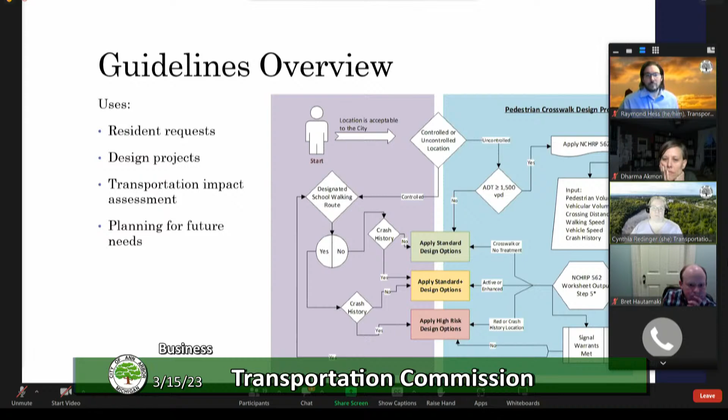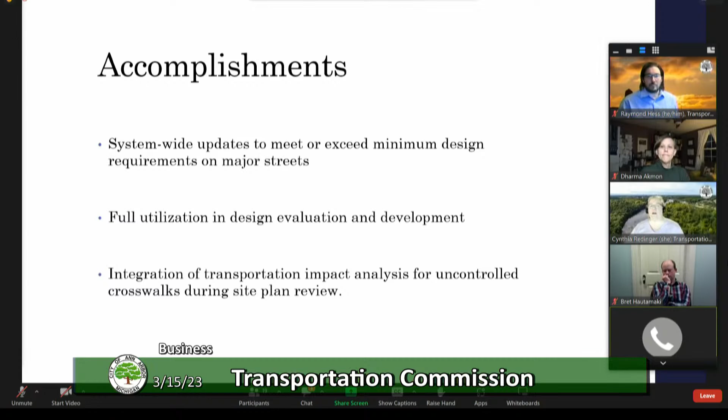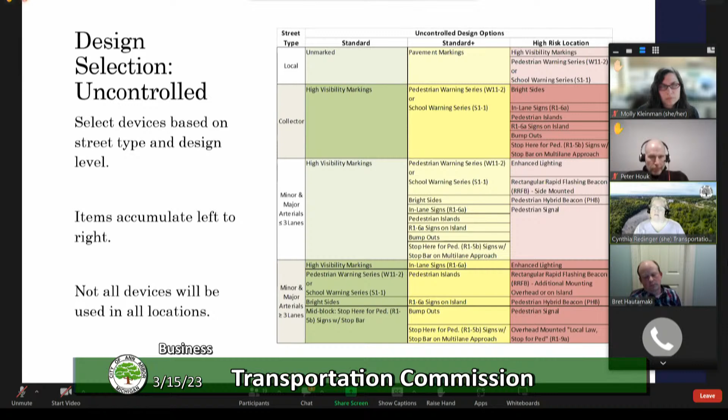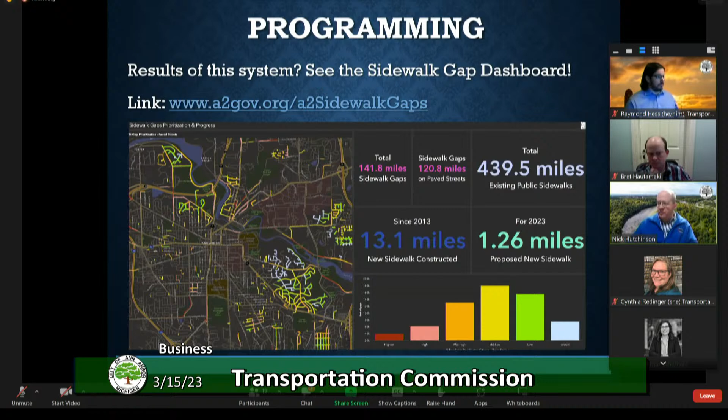Then for programming, we use that dashboard and where it lives in our GIS as we're going into trying to program sidewalk gap projects. We take the results from that prioritization system, look at those scores, and use that to create actual projects in the CIP. So larger gaps, bigger, expensive projects, maybe some higher scoring clusters, might get put into the CIP as a standalone project itself, an actual named project.

Some of the smaller bits of gaps here and there, we don't put all of those in as their own projects. Instead, we have an annual sidewalk gap filling general catch-all category. It's kind of similar to what we do with our local and major streets in the CIP. So some of the small gaps will get picked up in that annual gap filling program.

We also look at, as we create CIP projects, some of our other road and utility projects and whether they have gaps along them. Generally we're looking at categories that are mid-high to highest, the top 3 categories. If a gap scores in there, we'll consider including it in that other project, whether it's a road resurfacing or water main replacement, if it's feasible and if funding is available. We have a limited amount of funding for this, so we do what we can to include it in existing projects and take advantage of work that's already happening.

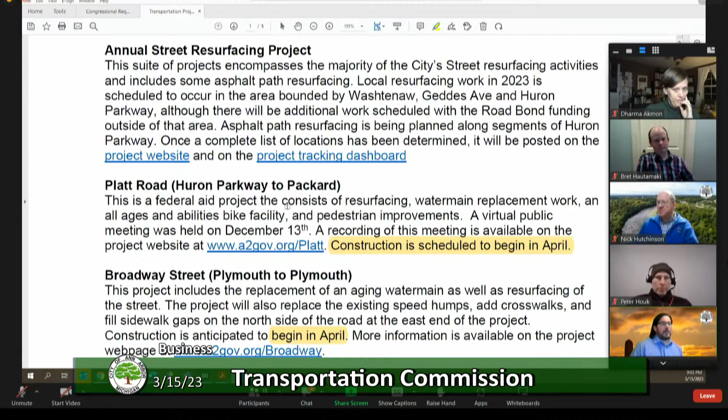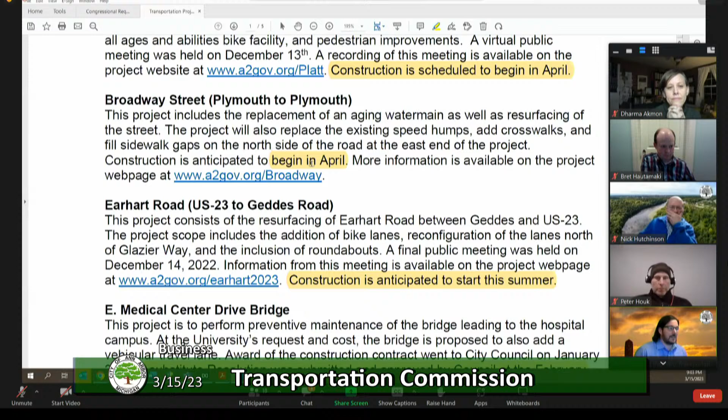Platt Road from Huron Parkway to Packard, construction is scheduled to begin in April, so keep an eye out for that. Similarly, Broadway Street from Plymouth to Plymouth will also begin in April. Earhart Road is anticipated to start this summer, that's what we've heard a lot about recently. This is from US 23 to Geddes Road.

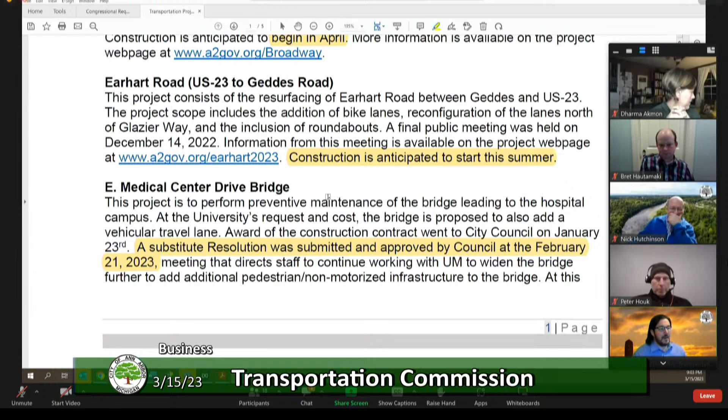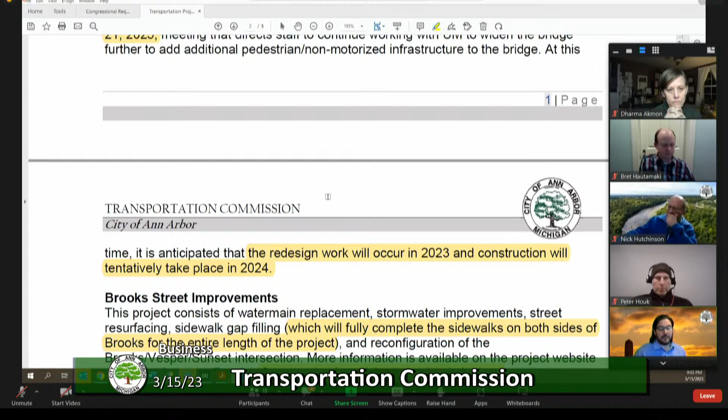East Medical Center Drive Bridge: there was a substitute resolution, which was approved by council at their meeting on the 21st, which was after your meeting last time. That directed staff to continue to work with the University of Michigan to enhance the pedestrian and non-motorized infrastructure on the bridge. The redesign work is going to happen this year, and construction is tentatively expected to happen in 2024.

Brooks Street will complete sidewalks on both sides for the entire length of the project, speaking of sidewalk gaps, and construction is anticipated to begin this June.

State and Hill improvements: final design changes do include a protected bike lane the length of the project, and 10.5-foot travel lanes to facilitate bus operations. I will note, when I was putting together my notes or highlights, there was a section that was dropped, which says bidding through MDOT has been delayed, and at this time it's anticipated that construction may not begin until late May or early June.

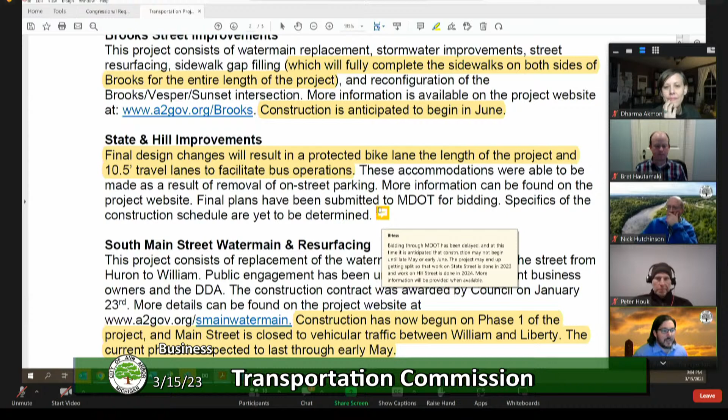The project may end up getting split so that work on State Street is done in 2023 and work on Hill is done in 2024. More information to be provided when available.

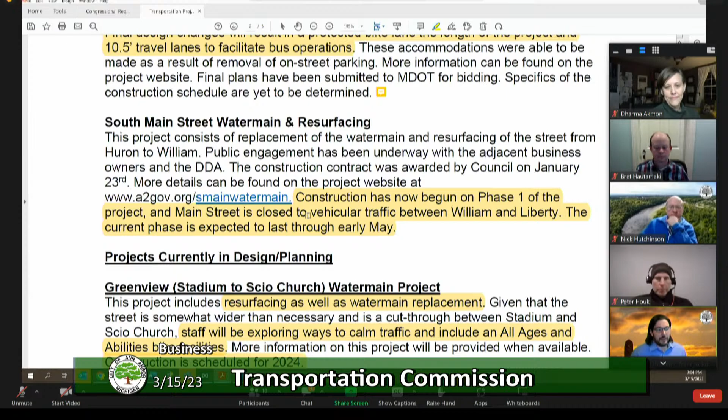South Main Street water main and resurfacing. If you've been downtown, you've probably seen this. Construction has begun on phase 1, and Main Street is closed to vehicular traffic between William and Liberty. Current phase is expected to last through early May.

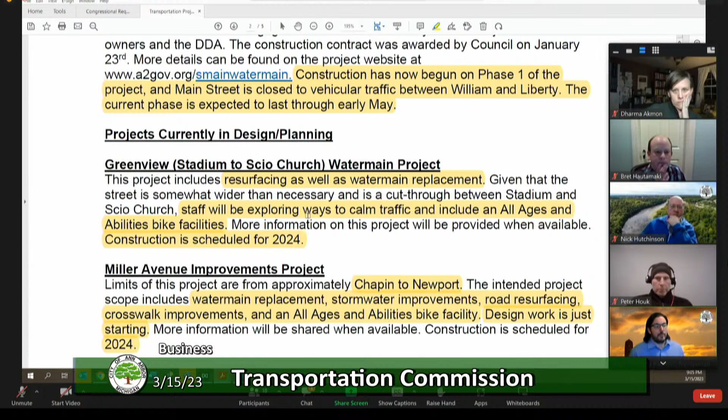Moving on to projects in design: Greenview from Stadium to Scio Church. There is actually a public engagement meeting scheduled for tomorrow night, so if you're familiar with the area, feel free to go to that. I believe it's at the Pittsfield Branch Library over in Oak Valley, where that's going to be held. This is a resurfacing and water main project, and as part of the discussion with the community, we'll be looking at ways to calm traffic and add an all ages and abilities bike facility.

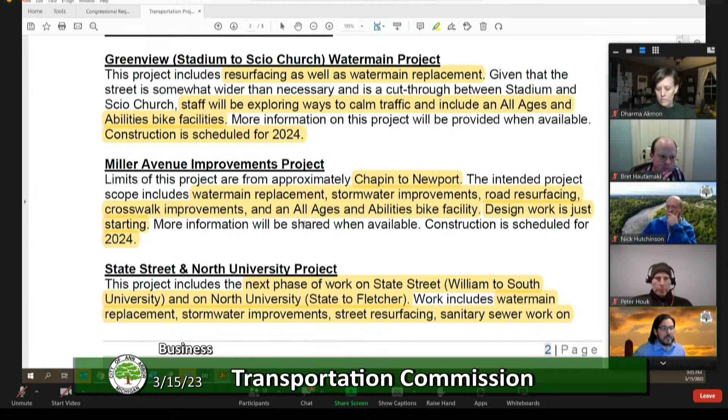Miller Avenue from Chapin to Newport includes water main, stormwater, road resurfacing, crosswalk improvements, and an all ages bike facility. Design work just started, but the hope is that construction will happen next year in 2024.

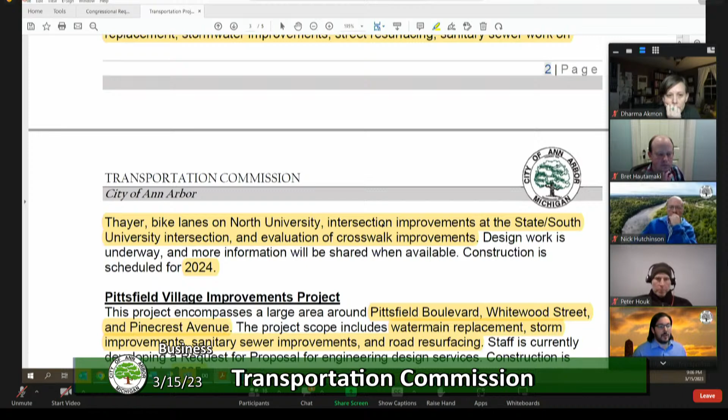State Street and North U: this is kind of the extension of the project that you saw last year. So State Street from William to South U, and then North U from State to Fletcher. Work includes water main, stormwater, street resurfacing, sanitary sewer, work on Thayer, and also bike lanes on North U, intersection improvements at State South U, and other crosswalk improvements will be part of the discussion. That project is also expected for next year in 2024.

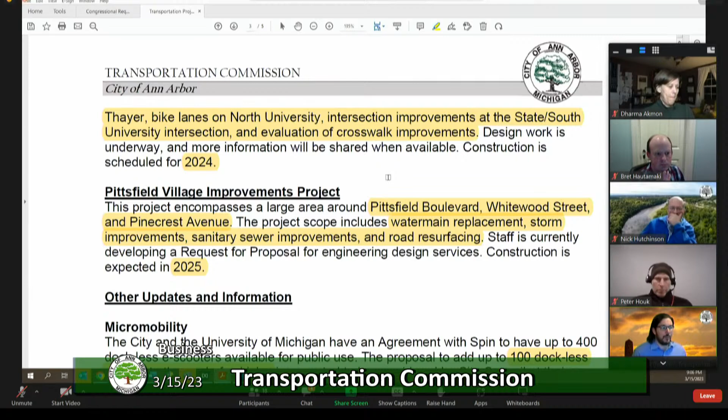Pittsfield Village improvements includes several different things on Pittsfield Boulevard, Whitewood, and Pinecrest, such as water main, storm improvements, sanitary sewer, and road resurfacing. That project is expected to occur or be constructed in 2025. You got the update on the e-scooters, so I can go past that.

MDOT: we're continuing to advance discussions with MDOT about the intersection of Jackson and Dexter / Revena, where the split is there. MDOT has agreed to a signal modernization, which will add a new crosswalk to the eastern leg of that intersection, so crossing Huron, and it will be an accessible pedestrian signal as well. That is expected to be constructed in 2024.

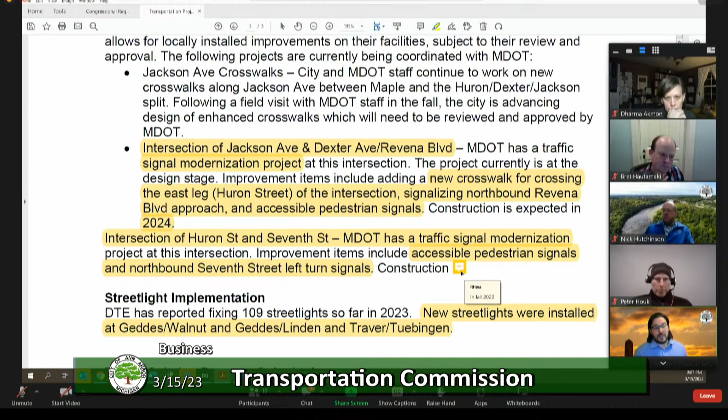And then there also is an intersection improvement project at Huron and 7th where traffic signal modernization will occur. That too will include accessible pedestrian signals, and it will include a northbound 7th Street left turn signals. Construction is expected in fall of 2023.

New streetlights were installed at Geddes/Walnut, Geddes/Linden, and Traver and Tuebingen.

Traffic calming is marching along. Granger from State to Packard had its second meeting in February. The other section of Granger, from Forest to Olivia, had its first meeting right after the last meeting, on February 16th. Fulmer from Miller to Foss had its first meeting on February 23rd, and Baldwin had its first meeting, I think actually tonight. There's a typo here - that's the meeting Cynthia was at before she joined us. So a lot of traffic calming petitions are moving through the process. As a reminder, we have a consultant helping us with that, and the next meeting of the traffic calming subcommittee will be next week on the 21st.

A lot of things on the transportation implementation plan update. The Vision Zero subcommittee had their last meeting on the 27th, where they looked at some of the technical memos and annual snapshot. Their next meeting will be on April 24th. That's our subcommittee of the Transportation Commission, as a reminder.

We closed the speed management program development for public comment at the end of February. We received 55 comments. We're actually thinking about doing another round of engagement using focus groups to make sure we're getting it right, so we're working with the Sam Schwartz team on what that might look like.